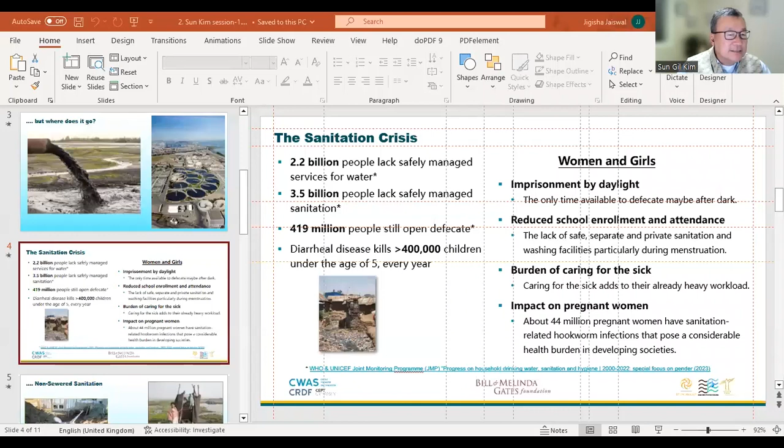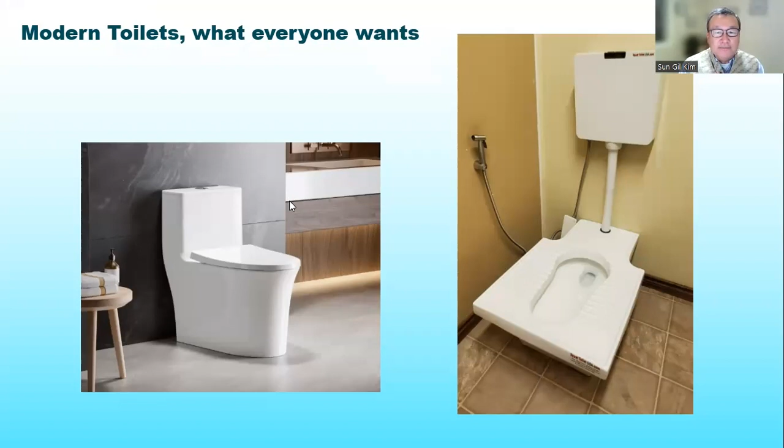So I have a question, I hope it's not too personal, but we're here to talk about toilets. So what kind of toilet do you and your family use, whether at home or work? Whether you sit or squat, wash or wipe, you are really fortunate if you have a very nice water flush toilet. But where does it go when you flush?

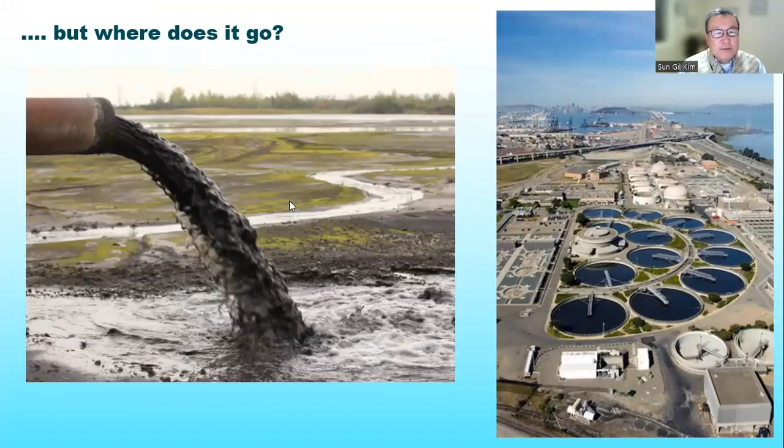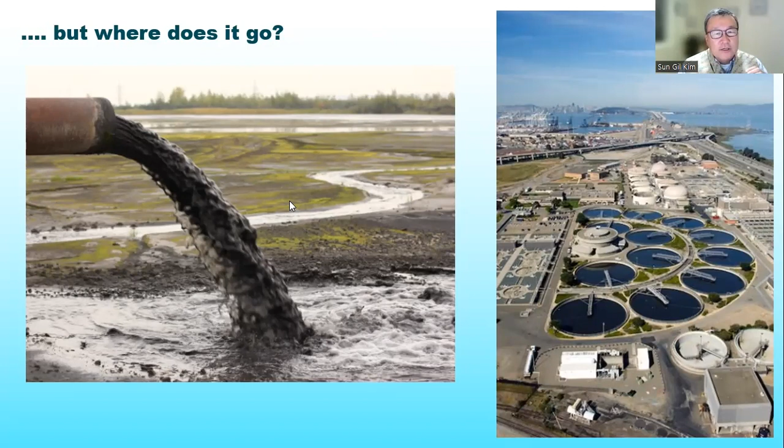Next slide please. Does it get treated like in the wastewater treatment plant that you see to the right, or does it just go directly into the environment? So the real question is, are the outputs safe for human consumption, or for humans and their health, and to the environment as it goes in? So I always think of it as, it's not just about where you go, but about where your waste goes. So it is a fundamental issue, and I think most of you on this call are probably familiar with that.

If you can go to the next slide please. According to the WHO and UNICEF Joint Monitoring Program's 2023 report, 2.2 billion people lack access to safely managed water services. And even more, 3.5 billion people lack access to safely managed sanitation. That's almost half the population of the world today. And there's also almost 420 million people still open defecating, really not by choice, but because that's really their best option. And that's really a problem.

And then also 400,000 or more young children die every year from preventable diarrheal diseases. I used to work at Boeing for almost three decades, and airplane safety was a really important aspect. And when an airplane or two would crash because of some problem, killing 300, 400 people, it would just make the world news. And yet here are 400,000 babies dying of preventable diarrheal diseases every year, yet not a lot in the news. It's really crazy. And then women and girls, certainly the impact to women and girls are particularly pronounced.

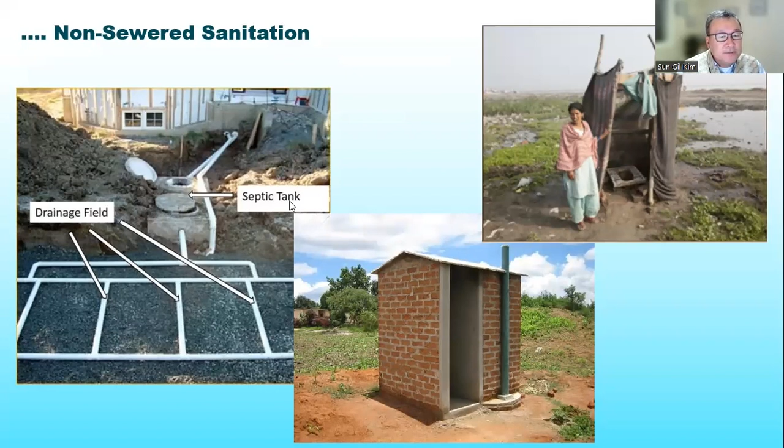Next slide please. So often the solutions for current on-site sanitation include septic tanks with a drain field, some treatment, or pit latrines, or sometimes just worse, maybe open defecation. And so we know that the problems with existing on-site sanitation, they're often built on site, so treatment is also typically minimal. And then also the build variation, the stick build can impact any treatment that is supposed to be doing and its usability, dependent on local conditions for drain fields and for soak pits.

It all depends on the soil conditions, whether it holds it for long enough, but also drains it appropriately before the pathogens possibly get into an adjacent water source, whether it's a borehole or surface water.

Can you go back to the prior slide? Sorry.

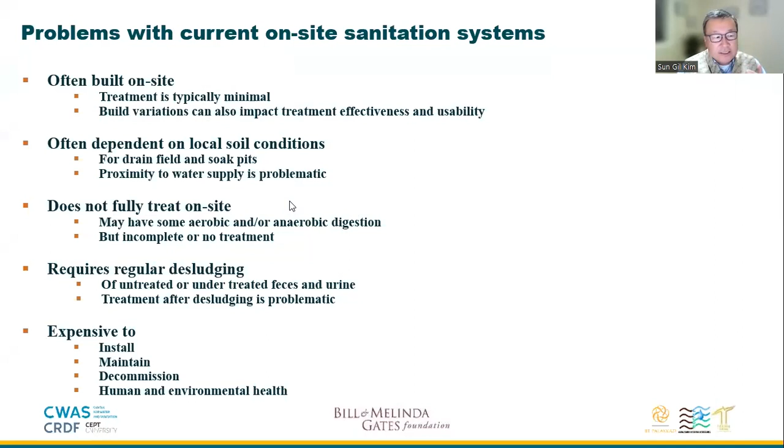Also, as I said, it does not treat on-site. Sometimes there may be aerobic or anaerobic digestion, but typically it's incomplete and requires regular desludging. And of course, where does the desludged material go? It's full of pathogens and environmental pollutants. So it's often very expensive to install, maintain, and decommission, with costs to human health and environmental health as well.

It's expected to fully treat on-site, so it's not just a toilet, but a treatment system. It treats human enteric pathogens, the fecal-oral transmitted diseases, as well as environmental parameters for the effluent, the liquids that come out of the system, gas emissions, odor, and noise.

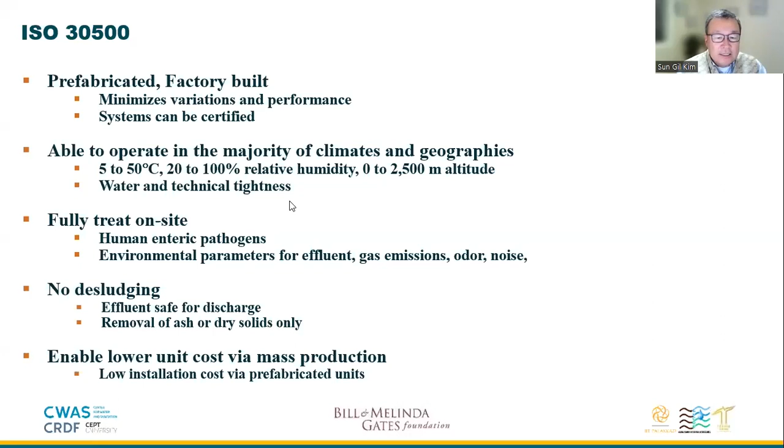So this is my final slide. The implementation of these quality standards is one of a number of factors, and these are just some of the factors that will revolutionize the non-sewer sanitation industry. The implementation of quality standards and the ability to certify systems will make readily available products that should drive down the cost, again, through mass production.

I will talk a little bit later about how a quality standard, like an ISO standard, is supportive of the regulatory environment, and I'll give you some examples of that. So with that, I'll hand it back to Dr. Sarosh. Thank you very much.

Thank you, Sun, for educating us on the impact that would possibly be generated, as well as the condition of the existing systems at large.

Now we will move on to the... you just muted, Dr. Sarosh. Yeah. I think there was an issue, I got muted.

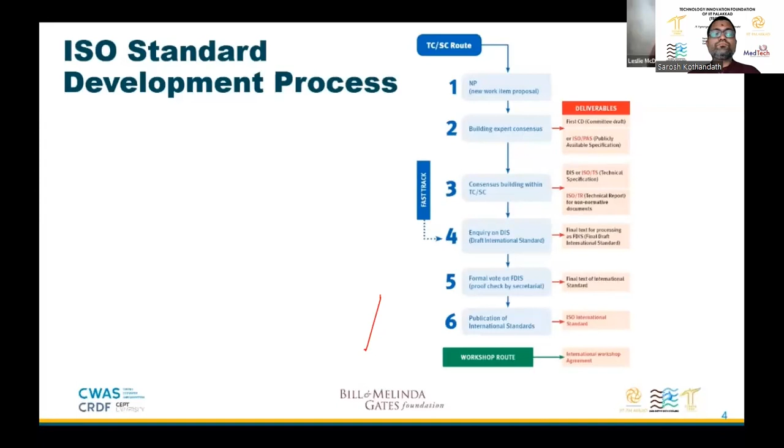So ISO 30500 was developed using this process by an ISO committee. That committee was called Project Committee, or PC 305. Project Committee just means that that committee was only developing one standard. So it's the same as a technical committee, except that most ISO technical committees are developing many standards instead of just one. That's the only difference between PC 305 and others.

PC 305 was established and followed the same process to develop the ISO standard as outlined on the previous slide. It began in 2016 with a new work item proposal for the new standard, which was circulated to all ISO member bodies to vote on whether it should be developed. At this point, there was no committee yet - all ISO members had a chance to vote. The vote was successful, and so PC 305 was established and began work right away, holding its first meeting in 2016.

I should mention that ANSI, along with ASN, the standards body of Senegal, served as the secretariat for PC 305 and led the work in developing the schedule and sending out comments and drafts to all the committee members throughout the development of ISO 30500. So the first few meetings were hosted in the US and in Senegal, in light of the fact that we were serving in a twinning arrangement as the secretariat.

Good morning, good evening, good afternoon, everyone. So I'll go into the technical details on 30500. It's a bit dry, I've tried to do my slides as interesting as possible, but please bear with me if it's a bit dry. So yeah, the introduction of 30500. Next slide, please.

So we'll start with the overview of what ISO 30500 is about. First of all, the entire certification, the certification bodies have to be accredited, and all the laboratories doing the testing need to be accredited as well. This is specified by the standard itself. And then, as you can see in the diagram over here, is a very summarized diagram of what a non-sewered sanitation system is about.

So the input would be feces, urine, and water if there's flush on the left. And then the system is evaluated on a lot of aspects. They can be mechanical, and then it can be electrical and even electromagnetic compatibility requirements. And the output side, where I think a lot of you are more interested, is the solid discharge, the liquid discharge, the air, the odor, and the noise. They all have requirements for all of them.

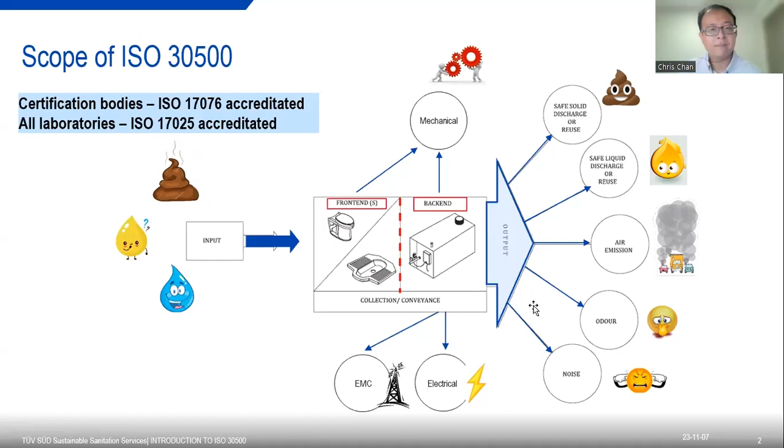Okay, so next slide, please.

So there's the timeline for the entire testing, which I will go through in detail in my next presentation. The standard requires, as mentioned, is broken down into class 1, which is non-biological systems, and class 2 and 3, which are biological and any other systems with more than one front end, the largest systems. Class 1 is a controlled laboratory testing for 32 days, and then a field testing for at least 1 month or 30 days.

And then class 2 and class 3, we have similar controlled laboratory testing, 32 days, and then a field testing of 5 months.

So the bottom right pie chart is our estimate or summary of how much commitment is needed for either the certification team, the manufacturers, or the laboratories. You can see the main chunk comes from the controlled laboratory testing, a lot of work needs to be done there. You can also see document checks and field testing, almost equal, plus some front-end testing if there's a front end for the system. So this is just a summary.

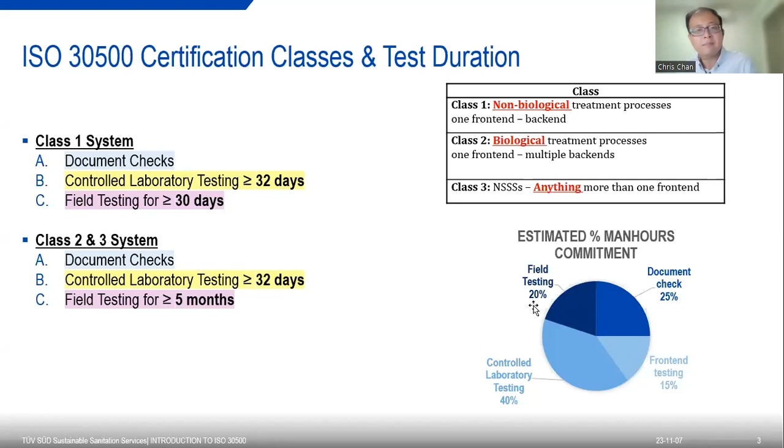Next slide, please. Okay, so going into the standard itself, the standard is really huge.

I managed to break it down into 3 sections. The document checks - there's a lot of documents that need to be checked throughout the entire certification. The certification team will need to request from the manufacturers, based on the clauses, what documents are really required, because all the systems are very different. It could be a combustion oxidation system, an electrochemical system, or a biological system. So every technology that we certify - there's no standard process.

There is a standard process, but it's always a different story whenever we do certification because of the various technologies. So for document checks, after we study the system, we will request from the manufacturers, based on the clauses, what needs to be provided. This is number 1, but I won't go through the details, it's very dry. If anyone wants more details, you can review the standard itself. It's basically broken down into these subcategories.

Today I'll go through more on the controlled laboratory testing, which is the bulk of the testing required, and I think would be the most important or difficult part for the manufacturers, because it's based on the design of the system. And then, of course, the field verification of performance.

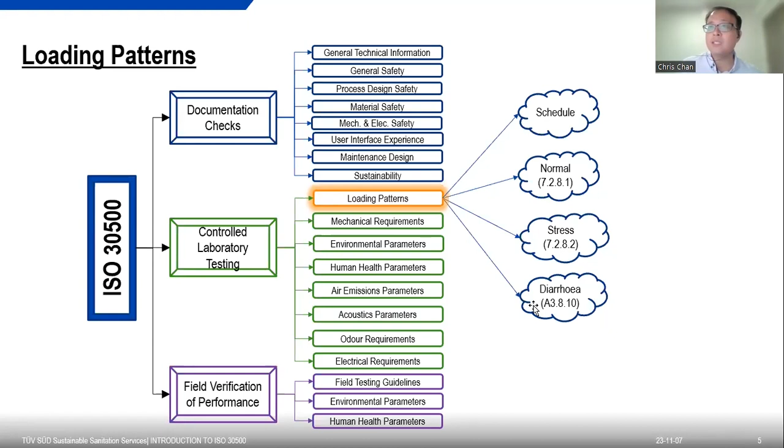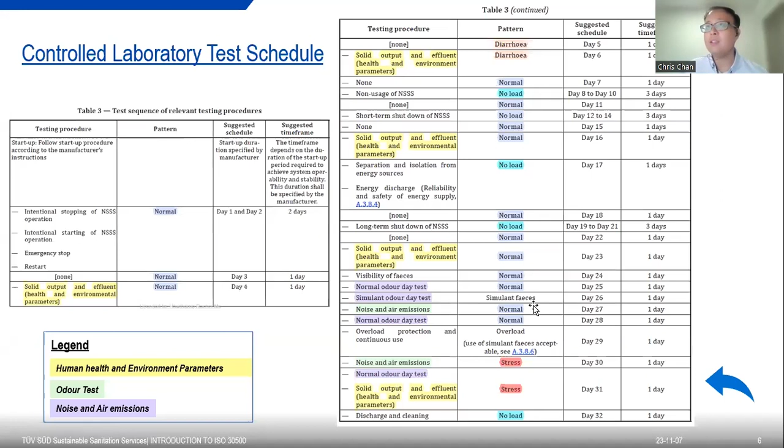And then the third and fourth columns are the day number and how many days it takes. As you can see, the last row is almost 32 days minimally required. This is required by the standard, not required by the certification body. Okay, moving on to the next slide.

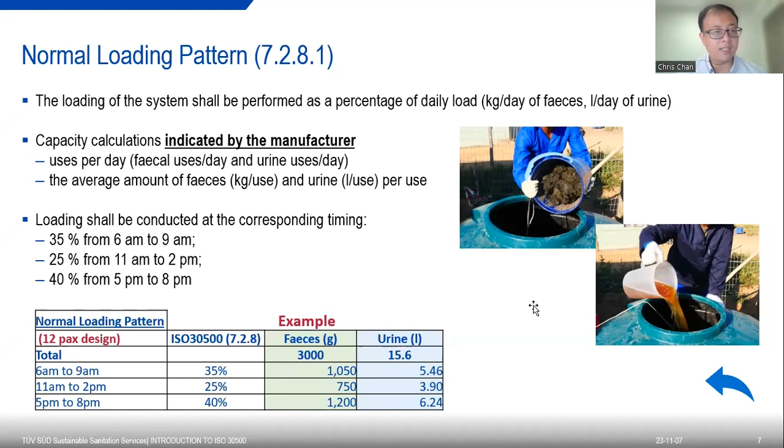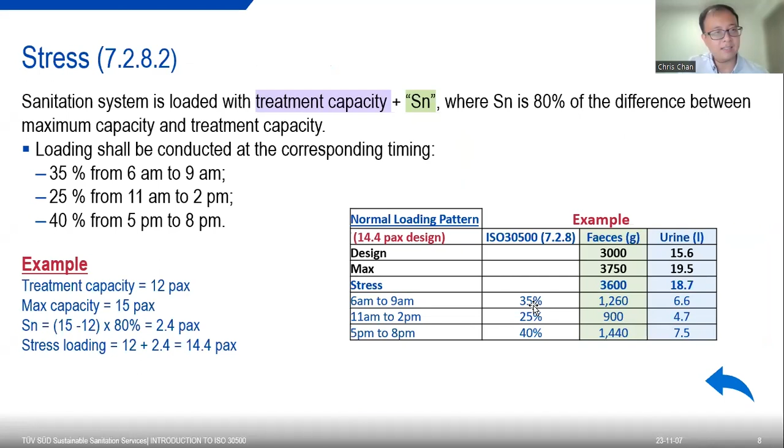Okay, next slide please. So that's the loading pattern, the normal loading. And then you have the stress loading pattern or stress loading days as well, with the formula there. And then you have, of course, the diarrhea days, where it assumes maybe half the household gets diarrhea, for example.

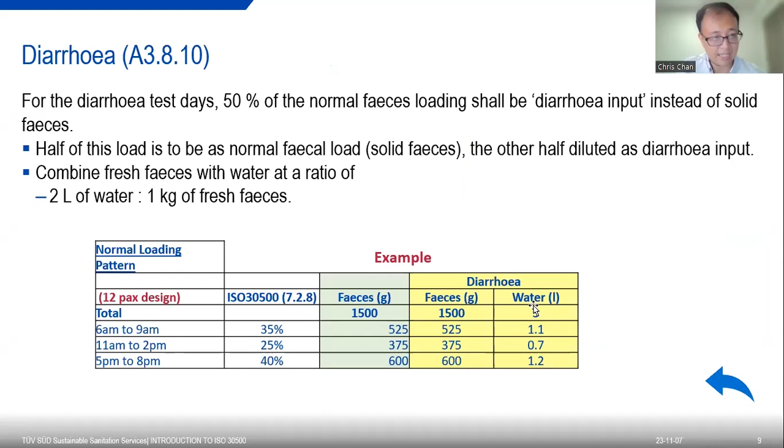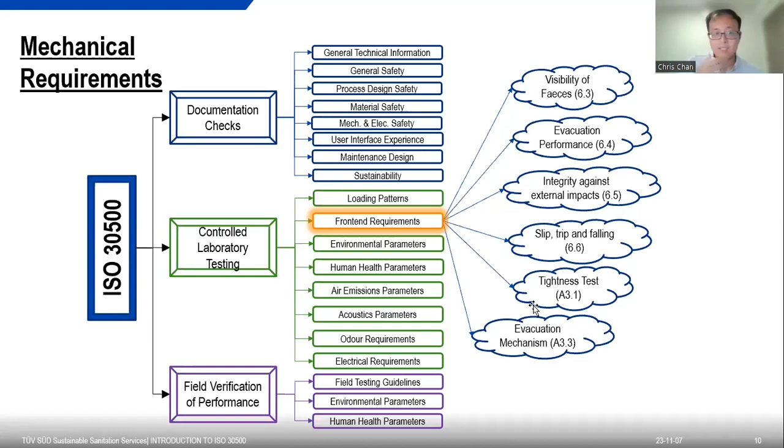So the front end requirements, as I mentioned in my first few slides, there's requirements for testing for the front end, which is a toilet bowl or squatting pan. So there's visibility of feces, evacuation, mechanism testing, etc. They all follow the reference EN standard for these kinds of front ends, which I won't go through. I'll go through the other environmental, human health, and other requirements.

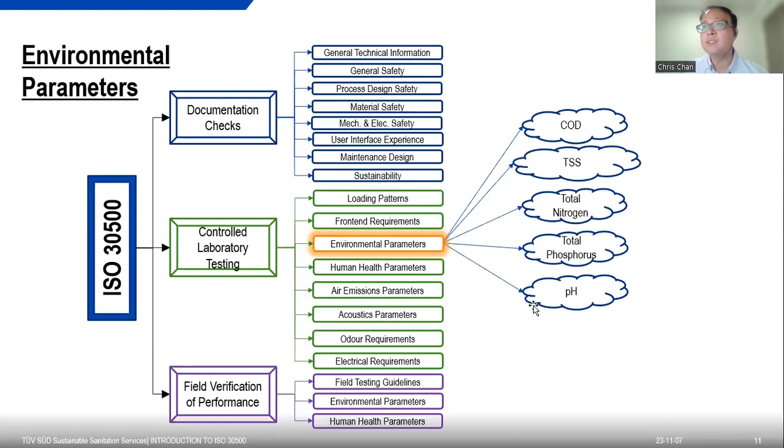So these are the values required before or when the effluent gets discharged into the environment. If you can see, the environmental parameters don't include the solids, because when the committee developed the standard, the solids were left out for the environmental side because there were debates or arguments that the solid could be used as fertilizer, for example, or for other purposes. So they would like to keep the nutrients in the solid as much as possible. But of course, the nutrients in the effluent have to be removed in case of illegal discharge out into the open or even the rivers, etc.

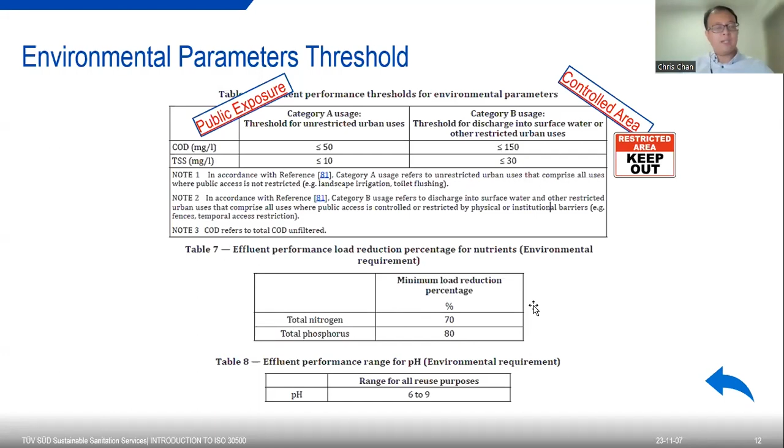Okay, and then we go to the human health parameters, which is one of the difficult parts from our experience. We have 4 pathogens in here.

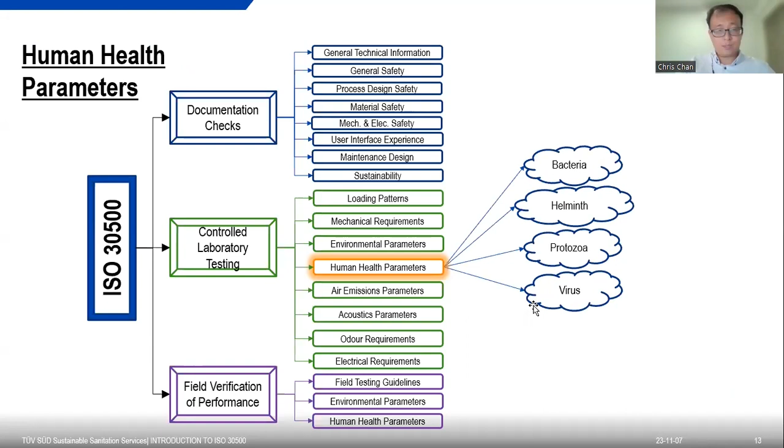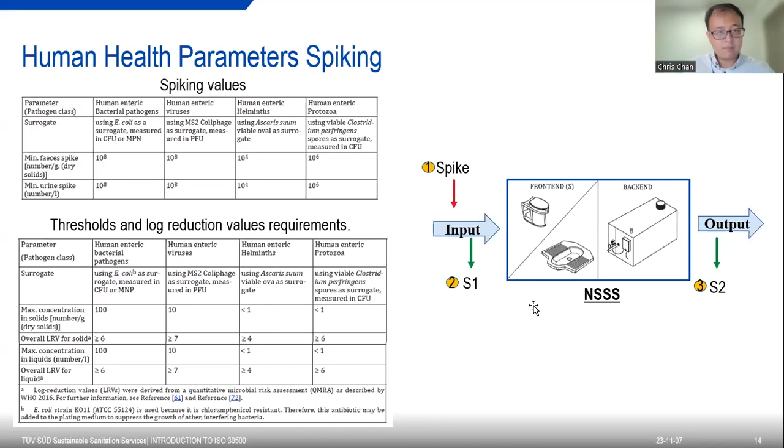So this is one of the most difficult parts of testing, because a lot of pathogen material is required. Depending on the system, the larger the system, the more spiking material is needed. And then these are some photos we've taken for testing certain units.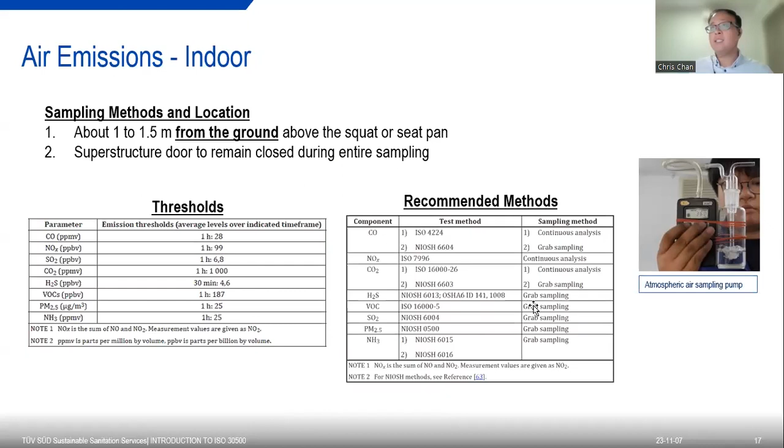And then you can see this is how the test setup is done. So we have the test setup in the front end, which is indoor. And we also have—this is not required by the standard, but we do it—a background noise testing for air emissions, because we realize that outside the lab, there's some outdoor air pollution that might interfere with the testing results.

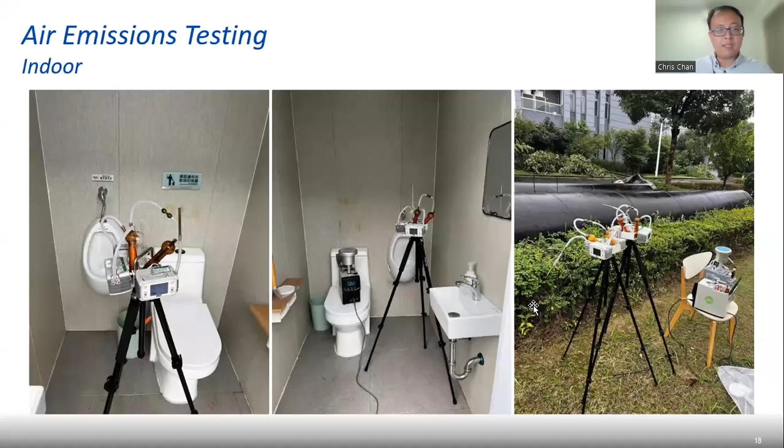Okay, and then you have the stack emissions as well. These are the parameters where the consideration is whether a stack emission would be bad or good for the surrounding people.

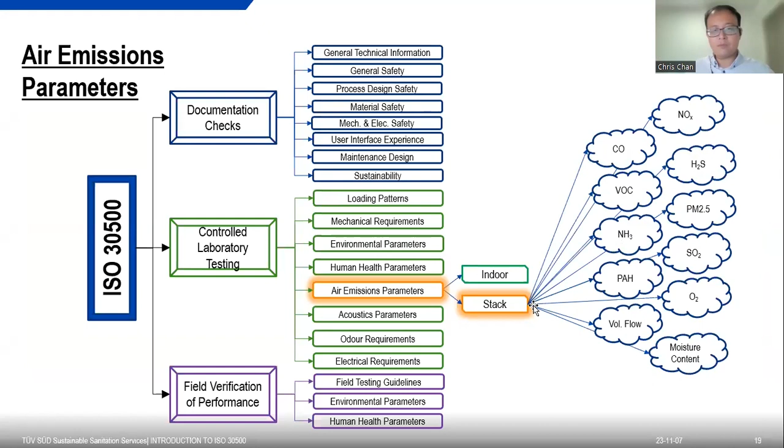So there's a requirement for the stack measurement, and basically it's just an emissions requirement for stack measurement. It's very common for air emission testing. You can see the values for the parameters given by the standard, and the standard always comes with the threshold and the recommended test methods as well, just to guide the users on how to do the testing.

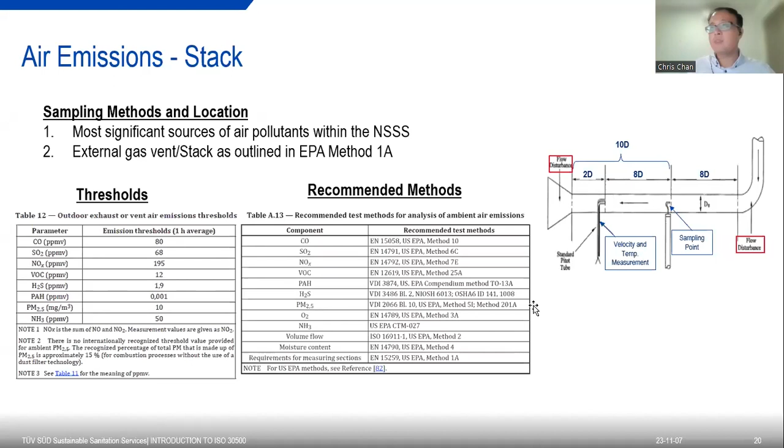Okay, next slide please. We're going to the acoustic or noise testing. Basically, similar to the air emissions, we have the internal testing and the external testing as well.

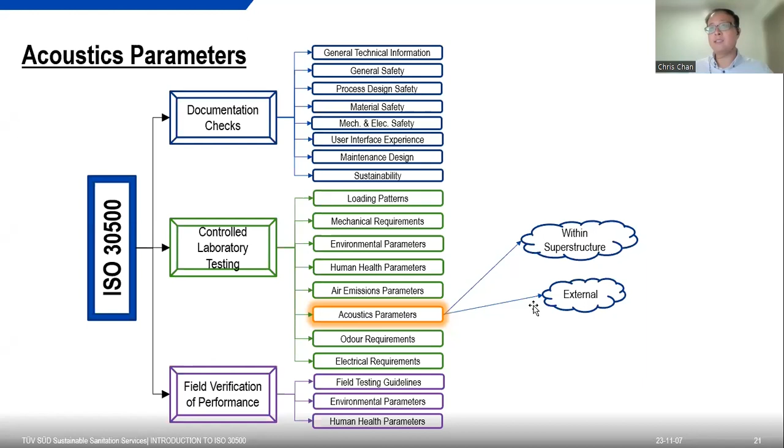Next slide. Yes, so you can see how it looks like. If it's an indoor noise testing, it's basically a microphone above the seat pan at 1.2 meters.

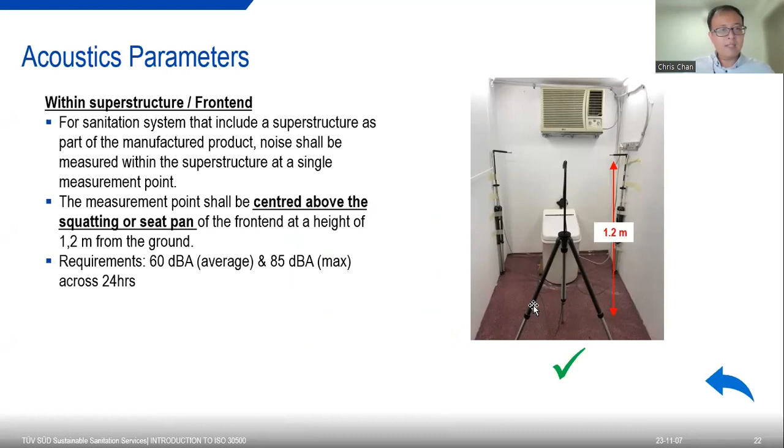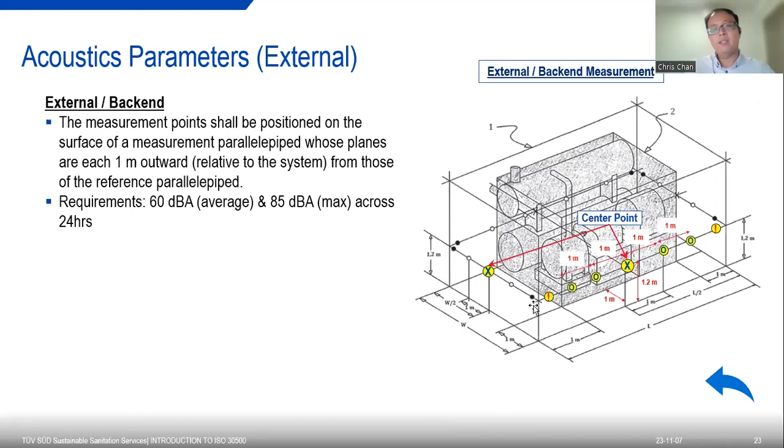Next slide please. And then you can see there's the back-end testing for any systems with the center point, and the measurements will be 1 meter apart. So if the system is very big, every 1 meter apart there will be one microphone testing it. The requirement would be a 60 dBA average for 24 hours, and at any one time it should not go past 85 decibels.

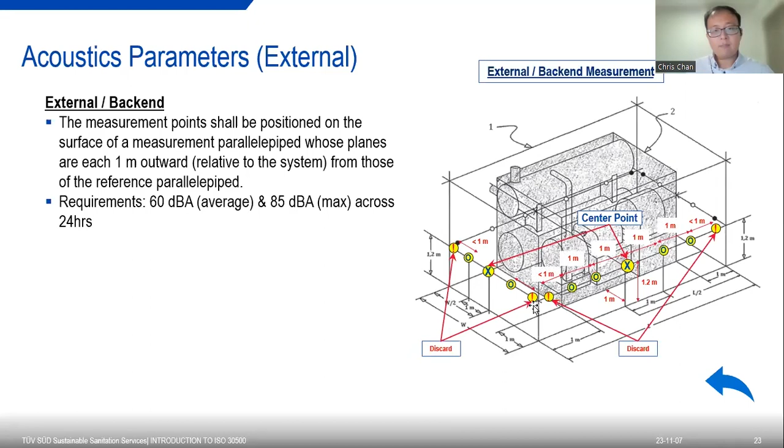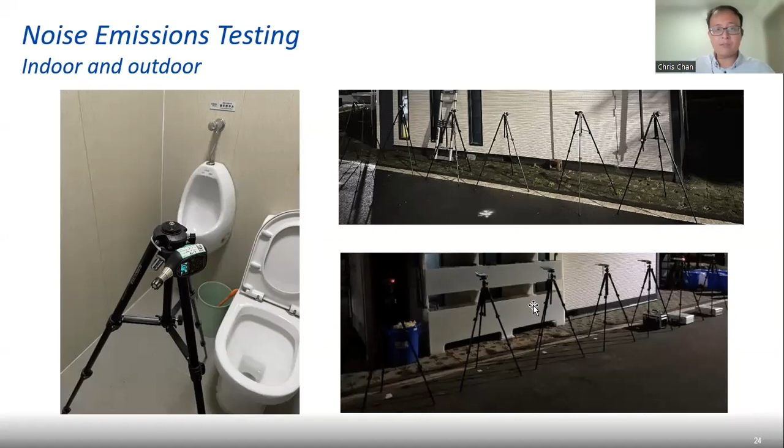Next slide please. So to have an understanding, this is what the noise testing looks like. If you see, I think this is a 20-foot container. You can see almost about 6 microphones on each side of the container.

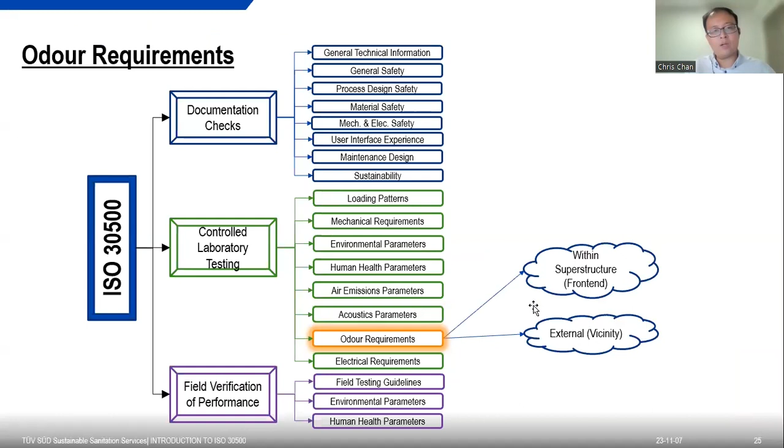Okay, similar to air emissions and noise, we have the odor testing, which is also indoor and outdoor testing. Next slide please. So the testing uses panelists, people to sniff the environment. These people are assessed before even going to site to do the testing. They will be assessed on how sensitive their nose is. There's a test method in the standard to verify these panelists, that their nose is not too sensitive or not sensitive enough.

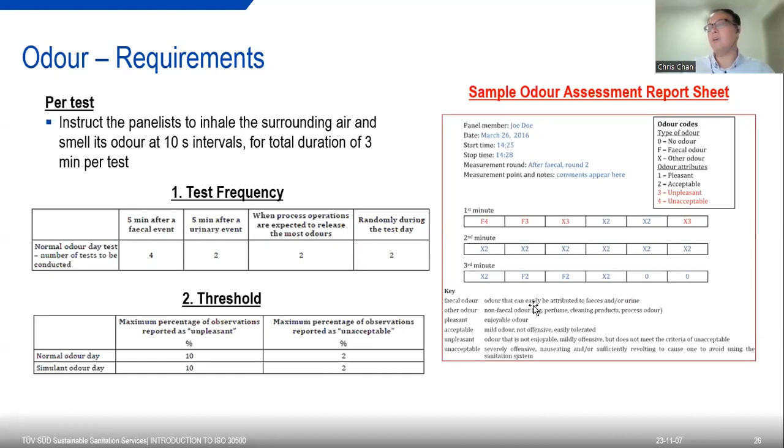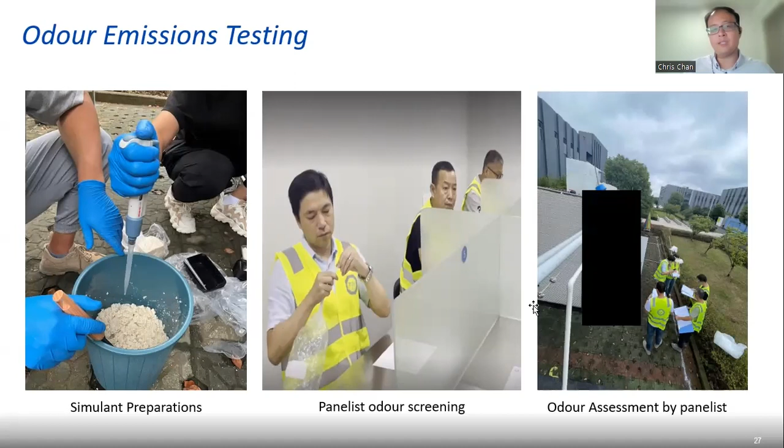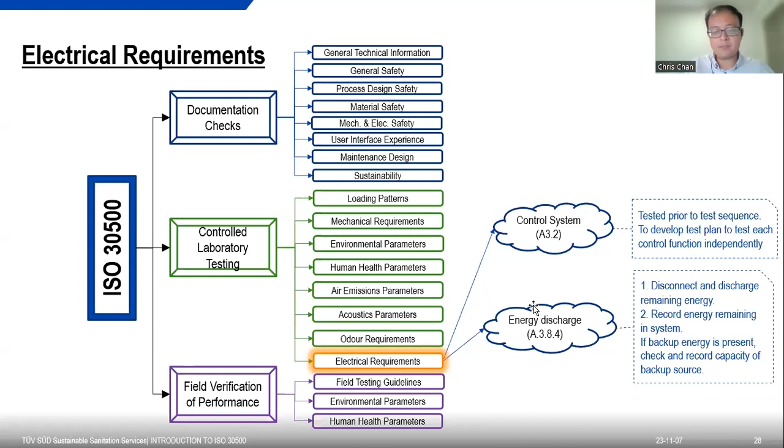Okay, and then last but not least, for the controlled laboratory testing - one slide before, sorry. So the electrical requirements are very minimal. For the ISO 30500, the electrical requirements are basically the control system. There's a guideline for the control system if there is one. And then the energy discharge - basically it has to be able to discharge its energy after it shuts down the system. Okay, next slide please.

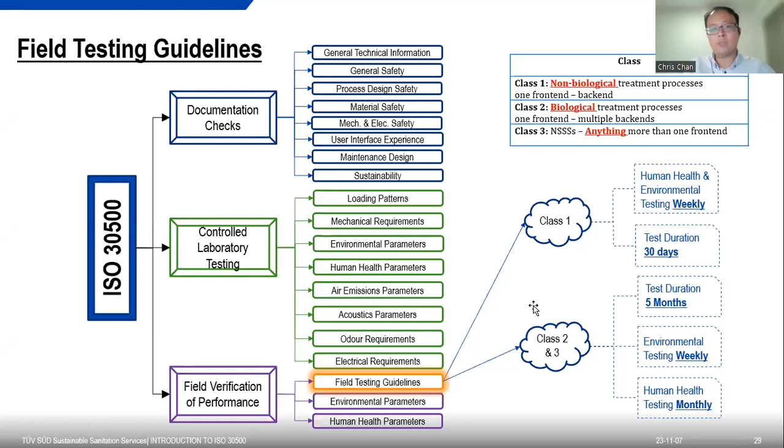And then going to the last few slides for this presentation is basically the field verification of performance, which is after the controlled laboratory testing - the unit will be sent to site to do further testing in the field, which is basically opening up to the public to use the toilet. So class 1 will need 30 days as mentioned in the first few slides, and class 2 and 3 will take 5 months. And then basically there's only environmental and human health testing for this period.

And you can see this would be the schedule of how the testing is. Environmental for class 1 will be weekly testing, and human health will be weekly as well. But class 2 and 3, as you see, is weekly testing for environmental, but only monthly testing for the human health.

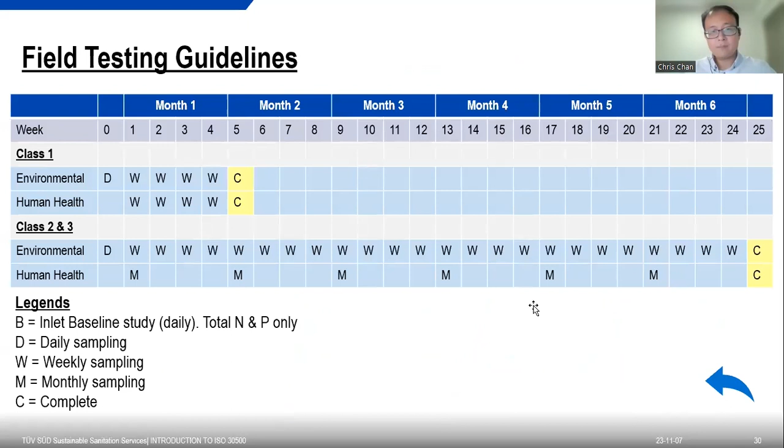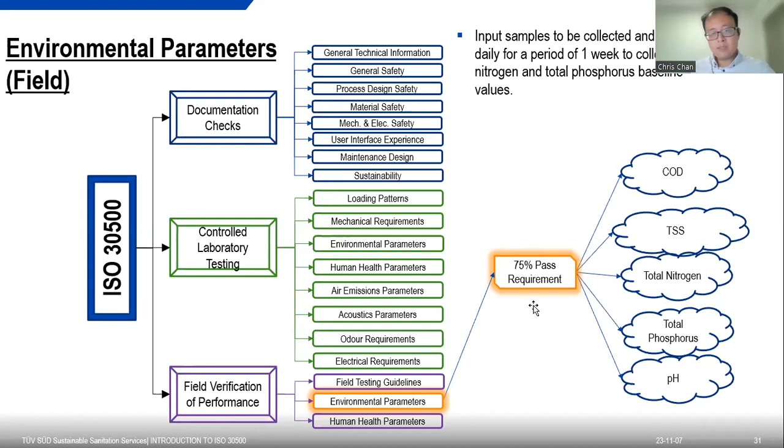Okay, next slide please. So the entire duration for the testing is similar to the controlled laboratory testing. The only difference is for environmental, you have a leeway to have a 75% pass requirement. And then for the human health, the entire duration has to pass for the bacteria, protozoa, and virus. And then helminth is removed from the field verification performance because the experts felt that protozoa validates the ascaris testing during the field testing.

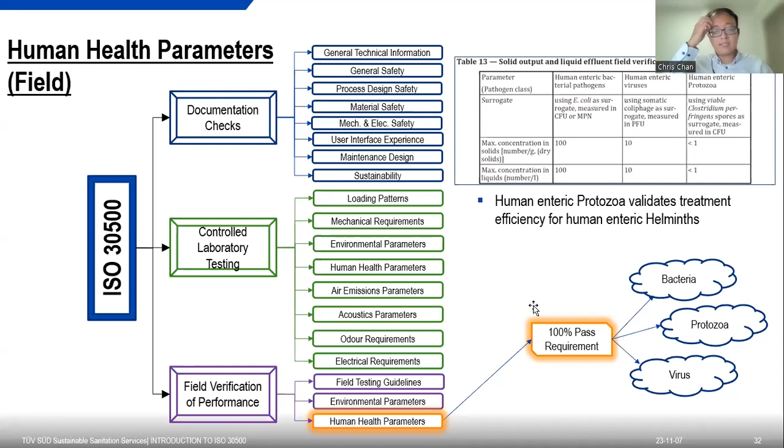Thank you, Chris, for briefing in detail about the requirements and technicalities of the standard. I suppose the certification process would be the one which would be more interesting to all our stakeholders. Let's move on to that. Over to you, please. Okay.

Thank you, Dr. Sarosh. So my next few slides will be very short, very to the point. As mentioned by Dr. Sarosh, I think a lot of people want to know the facts of certification. This is something I think this is the first time I'm sharing this, because as more information comes as time goes by, we have more information. This is some of the stuff that we managed to put together and update.

So what happens after standards publication? I'm not sure if everyone knows - after the standard is publicized, there's two routes. If the standards body adopts, or the national standards body adopts the standard, then we'll go to route A.

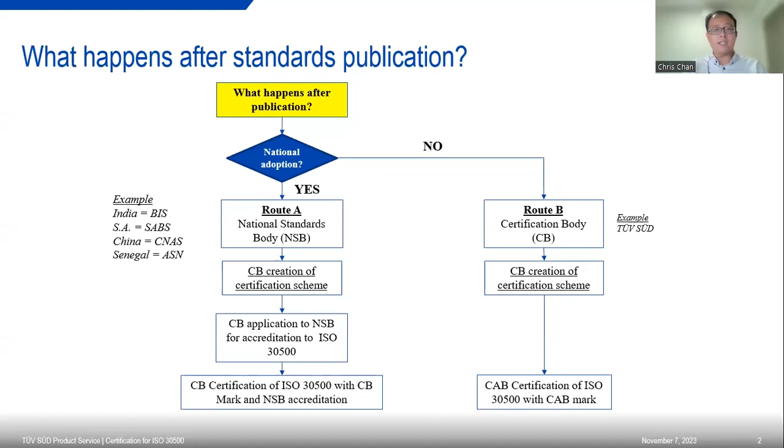Okay, next slide please. So this is how a typical certification is like. From the left column, manufacturers submit application, and then we plan, evaluate, and then we have the testing in the middle. In between, we have factory surveillance to ensure that the manufacturing and quality of the manufacturer's factory are there, so that the repetitive manufacturing of similar systems are of quality. Then after that, once the entire testing is done, the certification body will review all the test results and then issue a certificate.

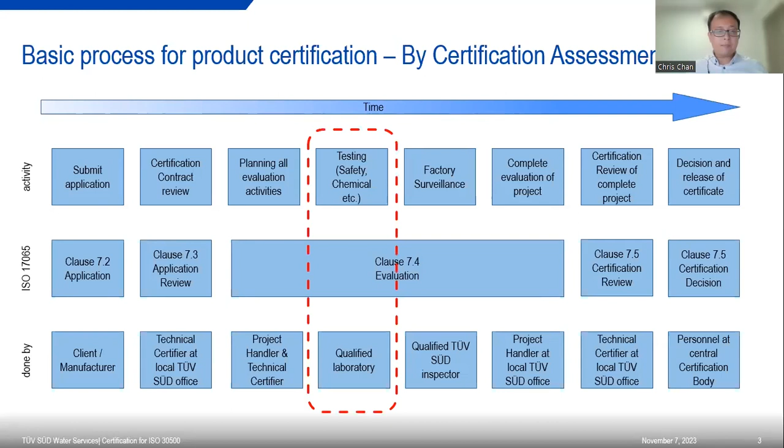Next slide please. So, okay, this is with regards to 30500. As you saw in the last presentation, the testing is ginormous. There's a lot of testing required and a lot of days required for the testing. So in a gist, this is a very rough estimate of how it looks like. Preparation phase for the certification body to really understand your system, to talk to you, to come up with a test plan, where to take samples, where to do spiking.

All these plus or minus will take 3 to 4 months. So you can see on the last column, the responsibility. Most of the responsibility, sometimes, comes from the manufacturers, especially in the testing phase. If you look at the testing phase, it goes through the entire requirements as shown in the last presentation, it takes about 3 months. And then you have the field testing, which was shown in the last few slides from the last presentation, that's 1 month, 5 months, and 5 months, depending on the class.

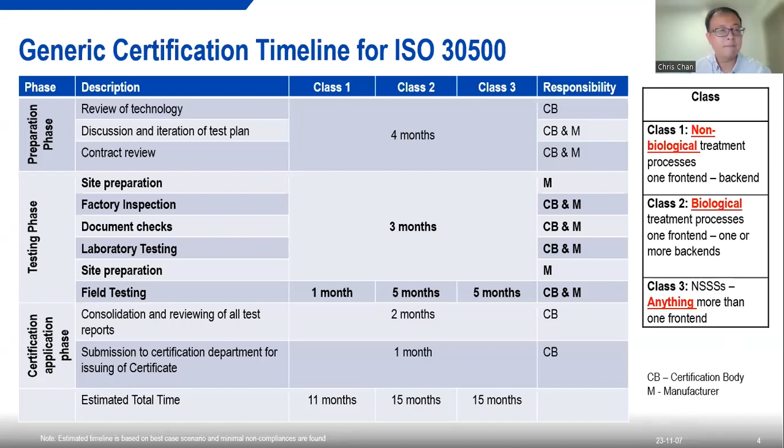So how the certification looks like - the actual certification looks like this. If the full certification is done, you get a certificate, as you can see on the right. You can see the marks, which can be pasted on the product directly to say that it is fully certified for ISO 30500. This is what it looks like.

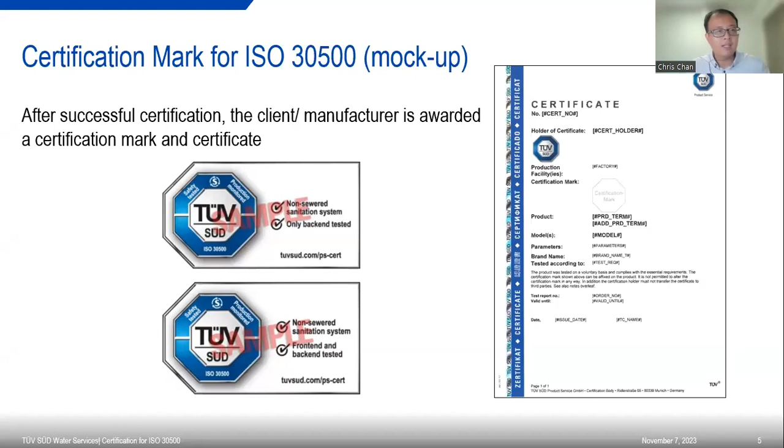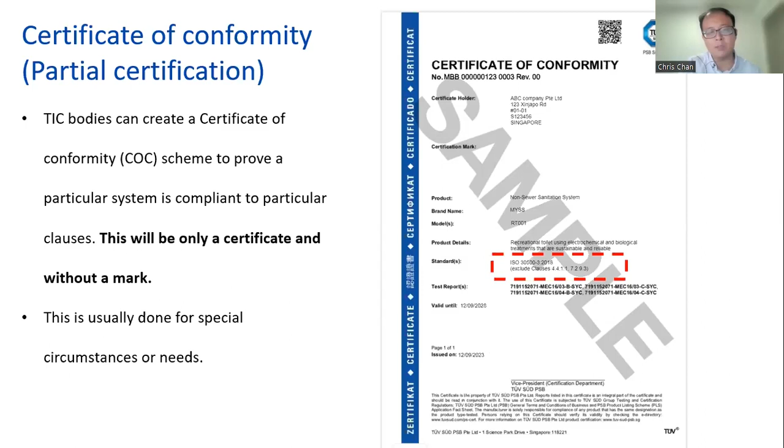Next slide please. This is an alternative which we haven't provided, and usually we need to discuss with the manufacturers the use for it. If there's not much use for it, we wouldn't really advise you to go for it. So this alternative would be a certificate of conformity, or in layman terms, just a partial certification. It will only be certified to certain clauses in the standard. So it really depends on what clauses you want to certify to and why. Maybe there might be a buyer that requires you to comply with clause 567 in ISO 30500, then we can do a partial certification for it. And the second alternative, as you can see, the cost is very high.

The duration is very long.

Whenever there's a testing that fails in the middle of the testing, we need to redo everything again. So we do not usually recommend someone who has not done their internal testing to go for full certification, because there's a high chance they might have overlooked things design-wise. Maybe they haven't encountered helminth spiking at certain levels before, and the systems cannot handle it, or the process duration just has to increase to cater for ISO 30500. So these are some things we need to be aware of.

And then TÜV SÜD, we created a sanitation readiness index, which helps. It's basically an online platform to check, a self-assessment for manufacturers to fill in to check whether they are close to certification or the gap is very wide. So this is just a tool for them to have a look before going to full certification.

Yes, and I think before going to the last slide, we have some questions that were posted before. What's the renewal for the certification?

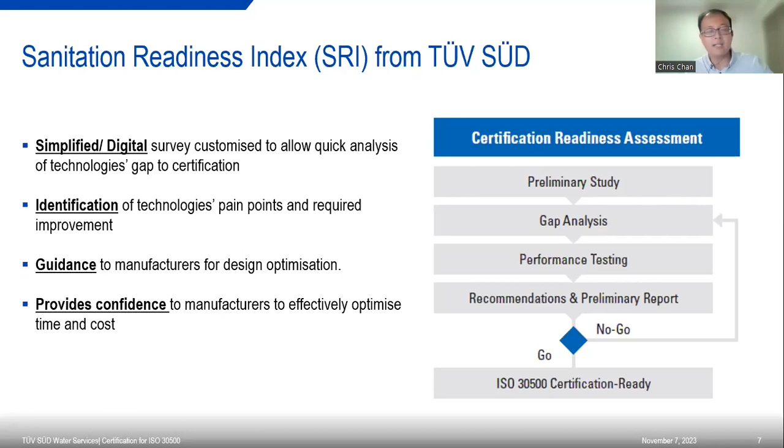So this is something that I wanted to highlight as well. So without further ado, I'll be ending my presentation, and then we can take some questions later.

Thank you, Dr. Sarosh. Yeah, hello again. So in this segment, I'll get into the implementation of the ISO 30500, and I'll try not to repeat what others have spoken about here. Next slide. I'd previously mentioned that we'll be getting into some examples of that supportive regulatory environment.

But before getting into that, I'd also like to show you some examples of integrated treatment systems that are designed to comply with the performance standard that Chris just mentioned. These are publicly available information. Anyway, next slide.

So Chris just explained the details of ISO 30500 as well as the certification process. It may seem dry, but the reality of it is super important, because it ensures that the products that are certified are safe for human health and the environment, and also pleasant to use. If you think about the noise aspect and the odor aspect, you can have wonderful machines that do wonderful things, but if nobody wants to use it, it will go into disuse and not really survive in the marketplace. So super important.

And I would like to just mention one thing. The actual user, if you could go back one slide, as the user you don't need to get into the details of this. It's the developers, manufacturers, and regulators that have to deal with the specific aspects that Chris mentioned. The user just has to be given the assurance that a certified product with a certification mark is in fact safe, and also they will be able to assess its use and its aspirational aspect.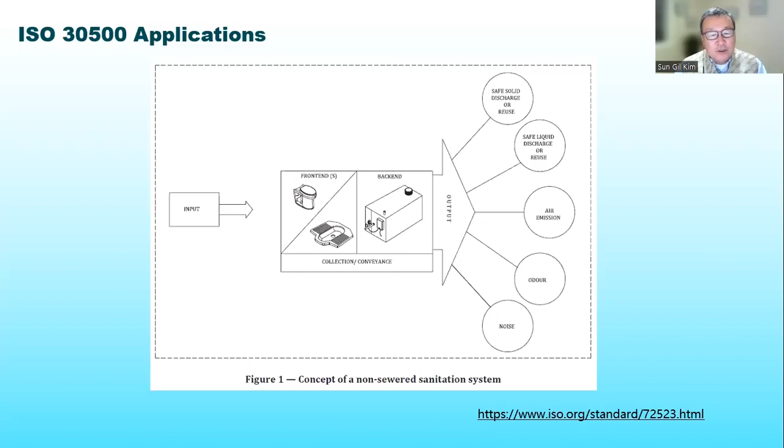So next slide. There are multiple efforts underway by developers and commercial entities to prove out and demonstrate these toilet systems. The picture I'll show you later, and what's listed here, are the community scale, bigger systems currently being demonstrated in India, China, South Africa, as well as Thailand. And then the next slide shows such systems.

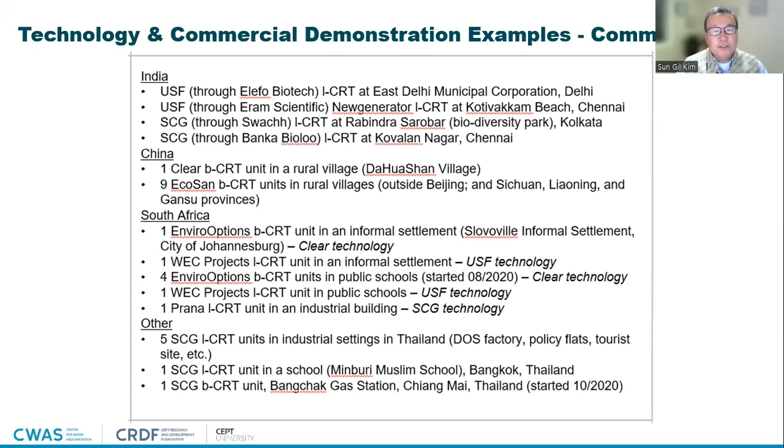Next slide, please. These tend to be bigger container-based systems. Typically the bigger systems tend to have a big biological component, as well as other disinfection elements. These systems are designed by EnviroOptions, WEC, Clear, Siam Cement Group in Thailand, and EcoSan.

And there are also a number of others, but again, this is what I can publicly share with you.

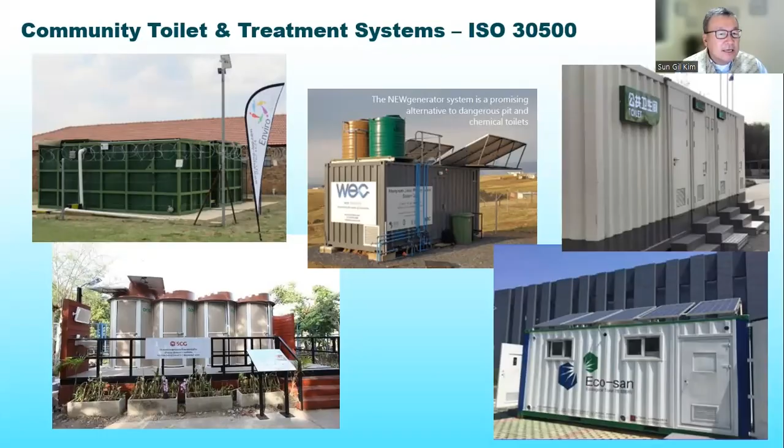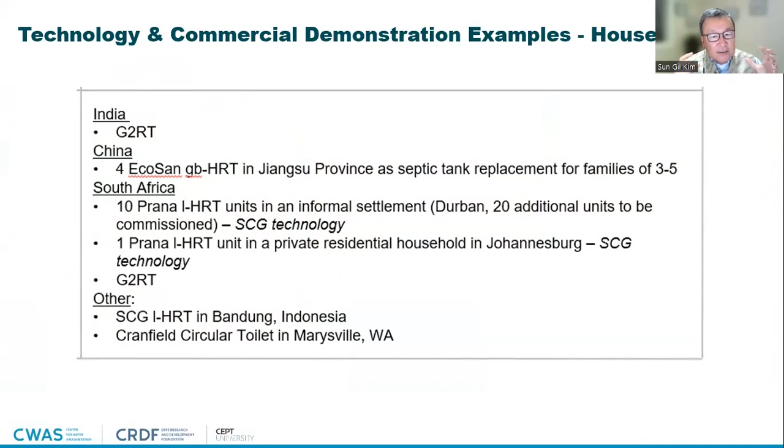The next slide shows the units being demonstrated for household scale appliances, done in India, China, South Africa, Indonesia, and the US. These are essentially home appliances you could install inside your home without issues, unlike pit latrines and other systems where you'd struggle with smell and leakage. These are intended to be fully tight, watertight, airtight, and to fully treat the system.

Please keep in mind these are just examples of some of the systems currently under development and demonstration. There are others being developed, but because of commercial, proprietary, and limited information, they cannot necessarily be shared with you. But more are coming, so it's quite exciting, actually.

So getting back to ISO 30500, next slide please. Chris mentioned about adoption and the paths to certification. Oh, if I could take a second back - in terms of certification, I think there was a question about...

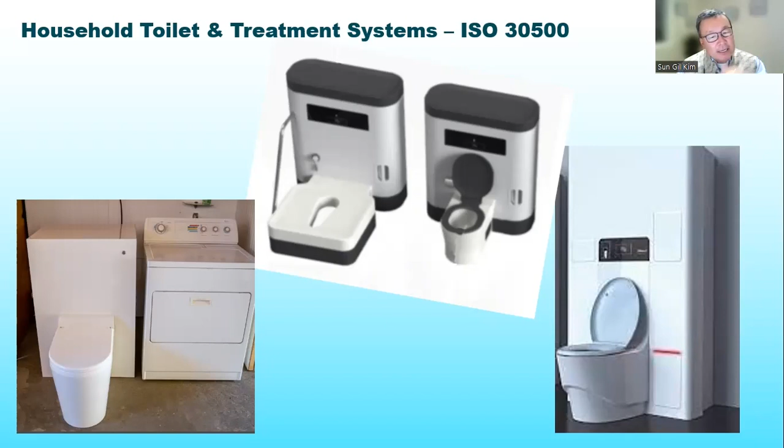Costs and duration - it is expensive and does take a while, but if you're just going to build 5 or 10 units, by no means do you want to go through the certification process. But if you're going to be building hundreds of thousands of units, the cost of certification can be spread over the multiple units. So hopefully, if you amortize it, it's less than $1 per unit if you build enough. That's where the real payback is - building lots of systems and driving out the cost. Sorry about that little detour.

So the adoption map - so far, 29 countries and 2 regional standards organizations have adopted ISO 30500 for implementation use. And China is going through a multi-year effort to nationally adopt the standard. SAC with their partner Huanka in Shanghai believe that by maybe end of this year or early next year, ISO 30500 will be virtually identically adopted in China. That's really exciting news.

But after national adoption, so what? What's next? Well, it's important to use the standard for design and build, of course, but also to integrate it into plumbing and building codes or regulations.

Some examples you see right here: in South Africa, after the standard was nationally adopted as SANS 30500, their national building regulations for non-sewered sanitation were revised to add SANS 30500 compliant systems as another alternative to existing chemical toilets and ventilated improved pit latrines.

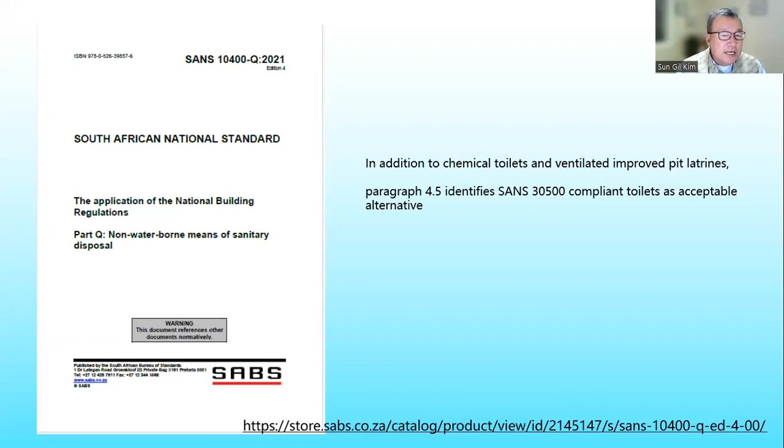If you go to the next slide, this is a screen print from the South African National Building Code showing SANS 30500 compliant systems as acceptable systems. This building code has been applicable since 2021, so really, South Africa is ready for these certified compliant products to be installed. Now it's a matter of commercializing and mass scale production of these systems - they are legal for use in South Africa today.

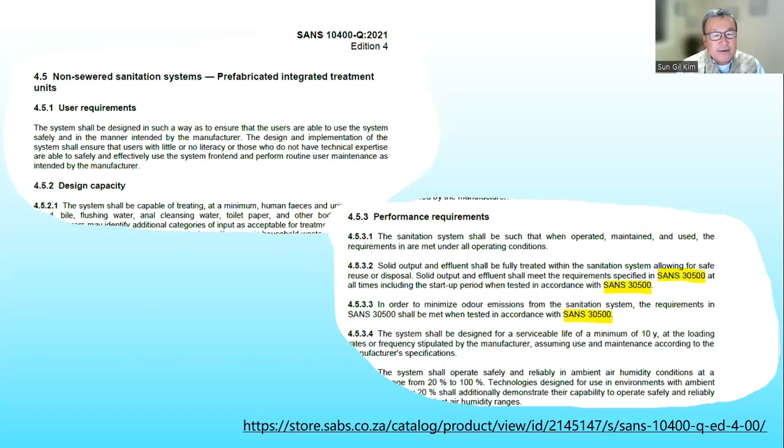Another example will be the US. You heard from Ms. Leslie McDermott from American National Standards Institute - so it's ANSI, Canadian, IAPMO, ISO 30500. Those compliance systems are included in Appendix O of IAPMO's 2024 Uniform Plumbing Code, and it is available today.

Now in the US it's a little bit different. US and Canada, even though there's a model code, it requires every state, county, and some of the bigger cities to actually include them in their own plumbing and building codes. So it's very segmented, very fragmented, and I know there are other countries that are like that. Whereas the opposite is that a country at the top level, once they integrate it into their building code, it flows down to everybody. So different countries approach it differently.

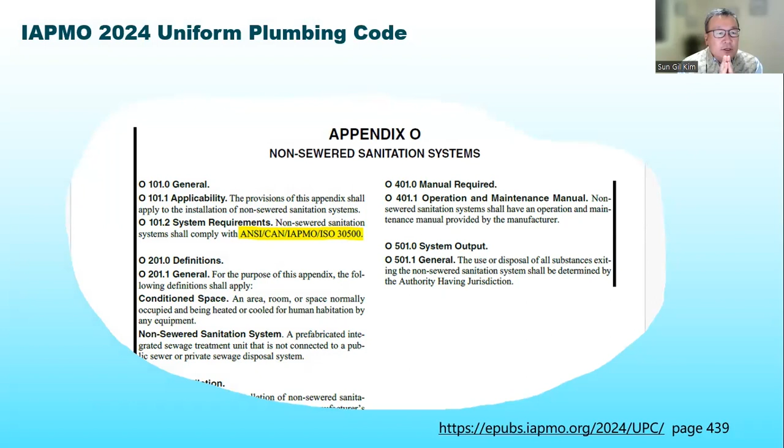So the next slide - IAPMO is one international organization that has these model codes. The International Code Council, ICC, is another one, and they have implemented IAPMO, ANSI, Canadian ISO 30500 into their plumbing codes, plumbing model codes, international residential building codes, and private sewage codes.

It's important to make very clear that inclusion in codes and regulations should not, must not, does not limit existing systems. You really want to allow compliance systems as an alternative, an acceptable option to what is already considered acceptable, and let the choice be up to the consumer and whoever is purchasing, whether it's a government entity or some other organization purchasing and subsidizing en masse. You really do not want to reduce what is available to address the sanitation crisis we're in today, and it will ultimately be customer preferences and market conditions that determine what is most suitable.

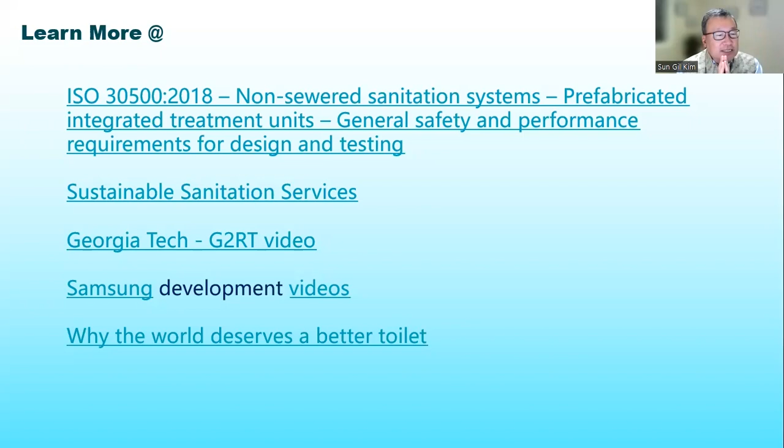And these are some links. I think Leslie mentioned the ANSI sanitation link, a great reference with a great deal of information. I know the non-sewered, Sustainable Sanitation Services link as well. I'd ask the supporters of this webinar to make these links available, along with some other publicly available videos and references. So with that, thank you so much, and thank you for listening today, and in the future we can work together and make a huge difference. So thank you.